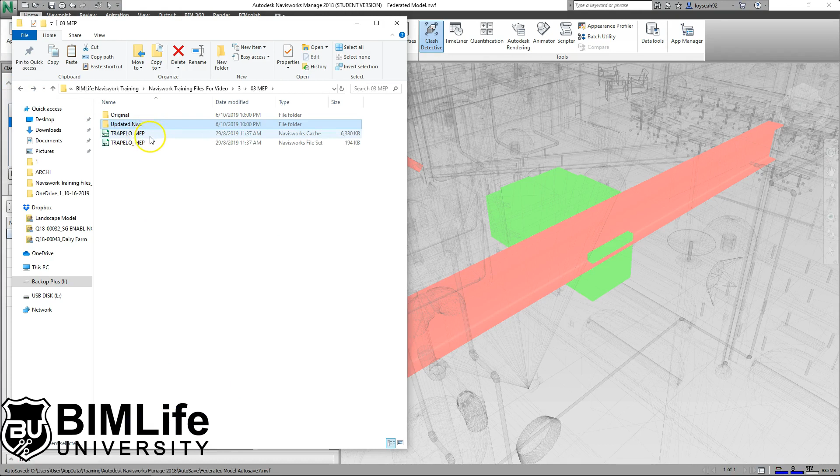Okay, copy this file here. Oops. Wait a minute. Okay, I have an issue with this. Anyway, after you copy, go back one step, and this is the existing, the old one. So just right click and override this, replace the file. Okay, so what we are simulating right now, MEP guys saw the report, they have fixed the issue, they come back 1 week later and tell us that they have updated the model.

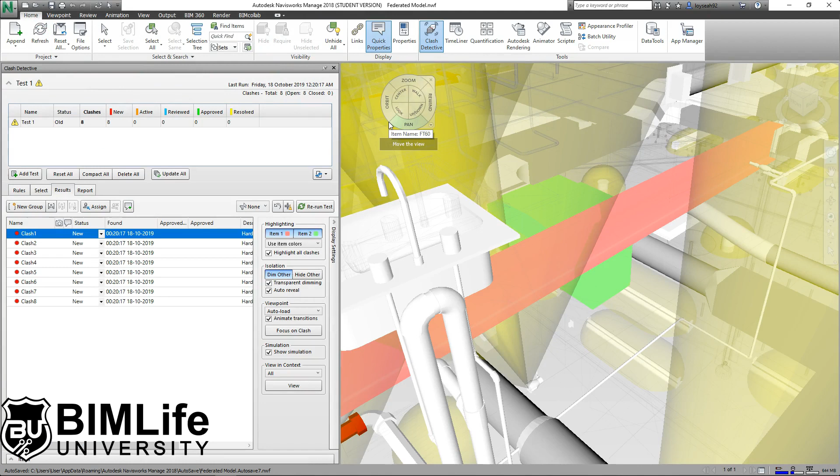Okay, so going back to Navisworks, go ahead and press the refresh button. Remember when you have an updated model, then you need to refresh, right? So that's what we're doing. It's kind of messy here, but don't worry about it too much. Just look at test number 1. You will see an exclamation mark, yellow in color, that appears after you click on the refresh button.

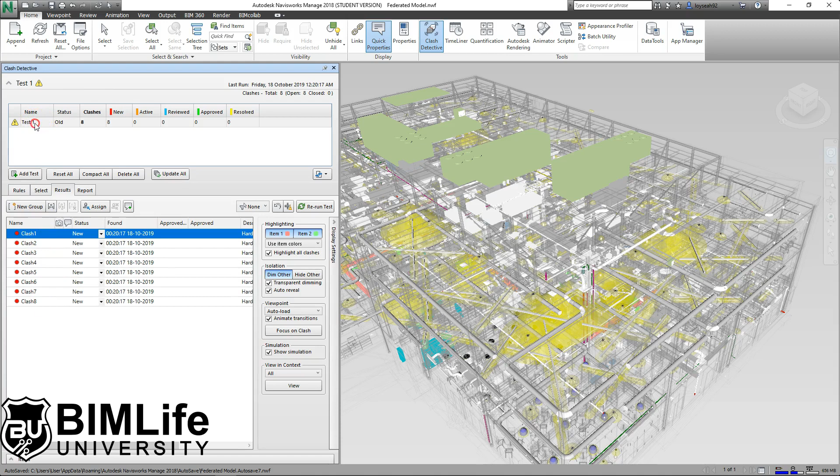And the reason why is because when there are new changes, you need to rerun the test. So the exclamation mark is telling you that your current results, there are 8 clashes, are not updated yet. You need to rerun it. So to rerun the test, just right click and run again. And you can see it's no longer red in color, right? Can you see it's all yellow, and the status is resolved.

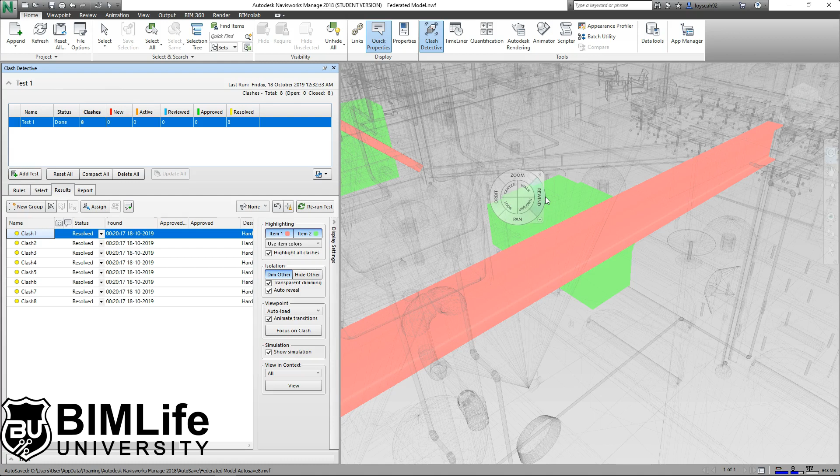Okay, so it means that they are right. These MEP subcontractors have fixed all the issues that we showed them in the clash report, and that's great. And if you want to, look around, just spend some time to maneuver around. Oops, here. Just go and see if there are clashes. There are probably no more clashes in the model itself. You can see they are close to each other, but they no longer clash as before.

Okay, so when they no longer clash, one of the behaviors that you can see over here, just because it doesn't clash anymore doesn't mean it's not going to show up. It's going to show up as resolved. It's not going to be blank. It's not going to be an empty clash report. It's going to show that you have these 8 resolved clashes.

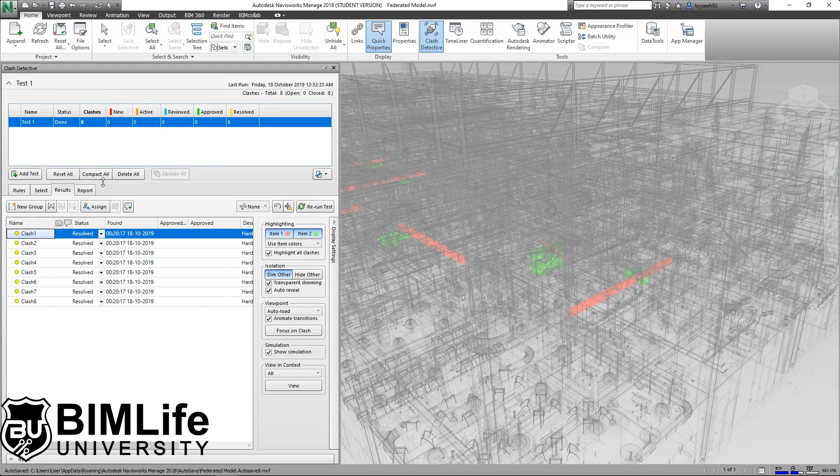Okay, so once you have your updated federated clash test, what you can do is you might want to create a report again, just to keep a backlog that the guys have changed the model or have resolved the conflicts in the model. Because the next button I'm going to teach you is this button called compact. If you hover over this button here, it says clear resolved clashes from this test.

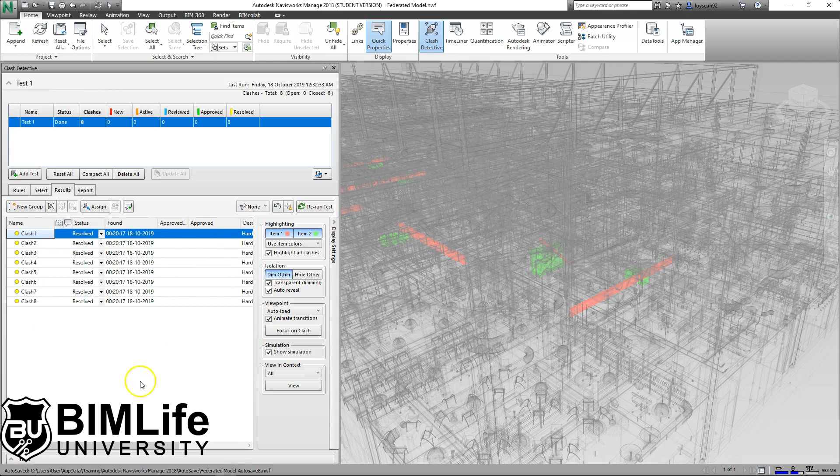The moment you press this button, these clashes that are resolved will not appear on this list anymore, which also means that if you wanted to do a report that showcases that people have been fixing the issues, you are no longer able to do that. So if you need a report to let different parties know that the issue is resolved, I recommend you write a report here. I'm not going to do that, but just in case you need it.

Okay, so go back to the results. You can use this compact, and anything that's resolved will no longer show up in this list anymore. And you will never get it back unless you go and revert back to the old MEP model, which is a hassle, right? So if you need a report, do the report first. Otherwise, if you feel that you don't need a report for resolved clashes, just use this button, compact, so you no longer see them again.

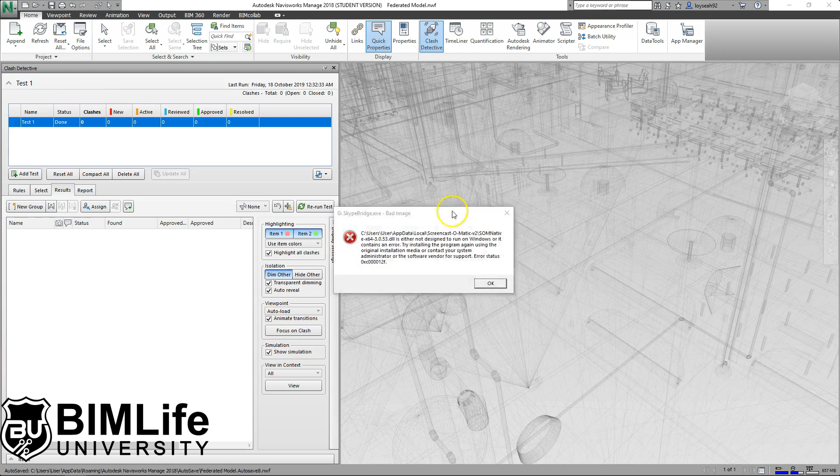Okay, let me see what else we have here. And yeah, we can basically save this file and close it. Remember, close is the new button. In the next video, we'll still be doing clash detection. I believe we have some time.

So what we can do here is go to folder number 4. I need you to go to folder number 4. Okay, so folder number 4 has a few files, and I need you to open the first file, 01 clashes, the Navisworks cache file. Go ahead with that.

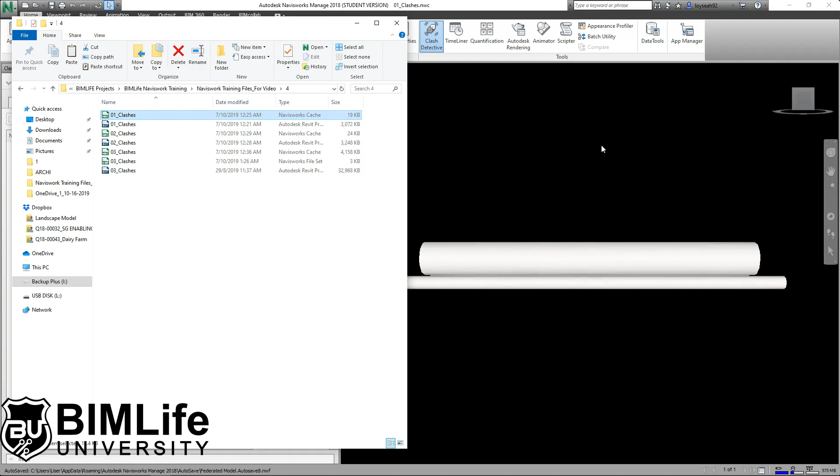And once you open the Navisworks cache file, you can see 4 pipes. Just rotate around, you should be able to see 4 pipes. And I want you to go to Viewpoint. Change the mode to be wireframe.

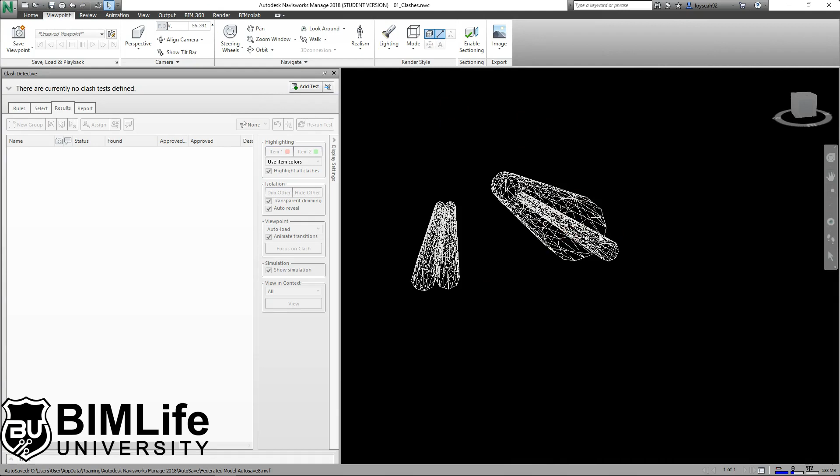Okay, and I have a task that I need you to do at this point in time. Let's take a look at the pipes. They are of different sizes, one big and one small one here. I want you to rotate and orientate yourself in such a way that you figure out whether these two objects here are touching each other.

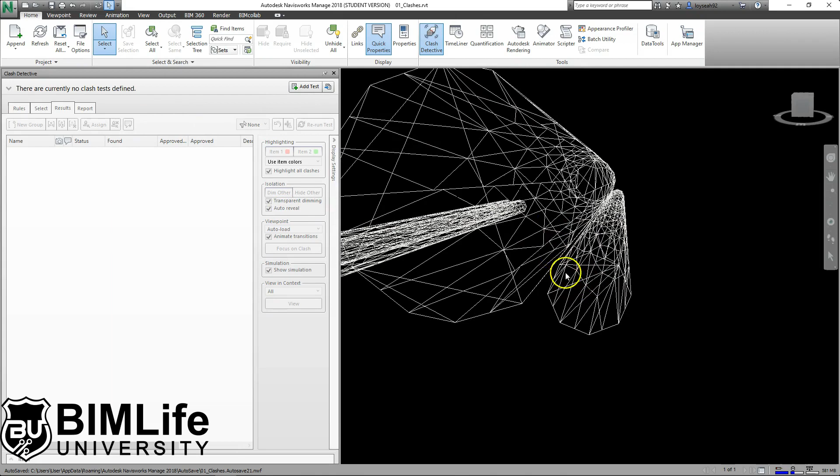So right now we are going to use the clash detection tool to prove that there's actually no clash. Add test, and there's no sets created in this file. So click on the large pipe and use this button called Use Current Selection.

And you can see this is the third pipe. There are 4 pipes in total in this file. Now click on the smaller pipe and use the same button, Use Current Selection, except that you will be on Selection B here. So this one here is the 4th pipe. It doesn't really matter between the 3rd and 4th pipe. I'm just telling you that each object belongs to one of these items in the list.

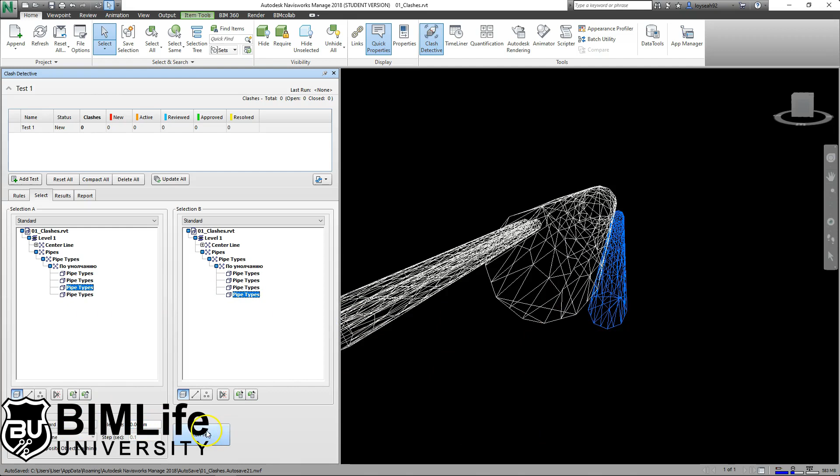Just make sure this is hard and tolerance 0.001, and we run test, and there is no result, which means there is no clash. It also means that we confirm there is actually no clash between these two objects at this point in time. So right now I want you to click on this Navisworks icon, Options.

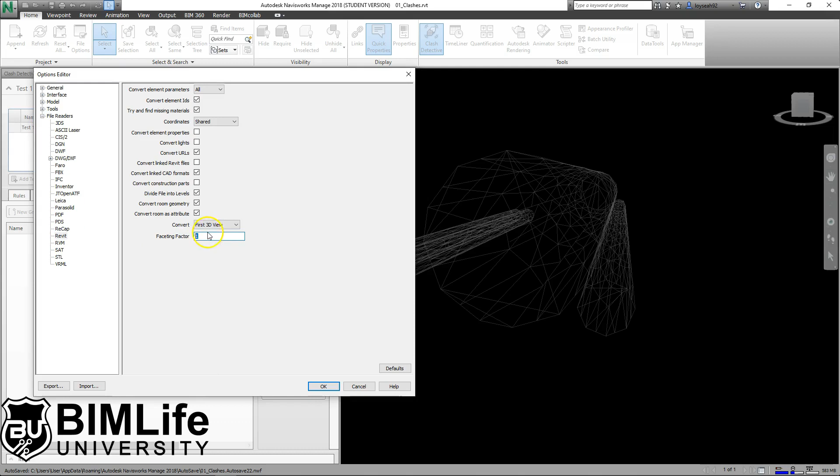File Readers. Click on the plus icon, go to Revit, and you'll see this setting called Faceting Factor. At this point in time your computer should show 1. I want you to change it to 50. Press the OK button, and you will realize that nothing actually changed.

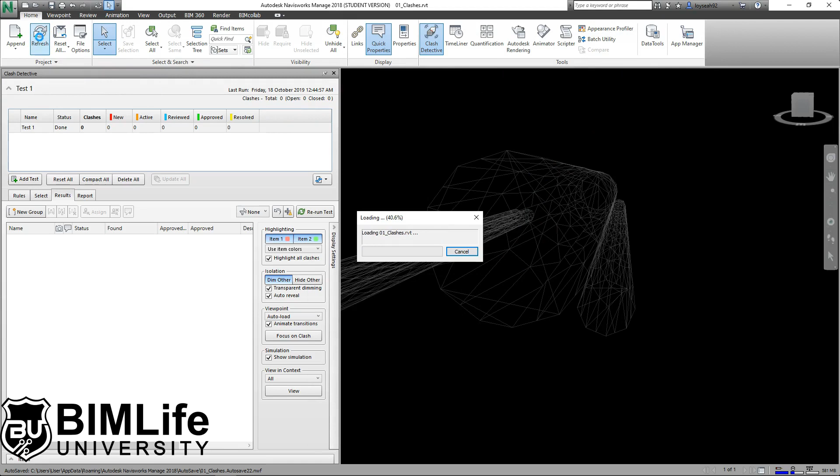But I'm going to take a snapshot of the current view that we have. So this is how it looks currently, and I want you to click on the refresh button. When you change the factor, you need to click on refresh to see changes. So what does the factor actually do? You can see when you increase the factor, there are more lines drawn. It looks more completely rounded.

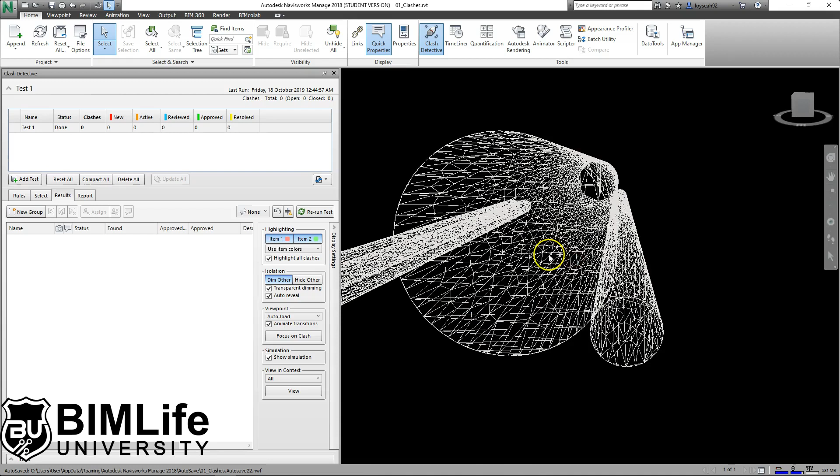So after you change the factor itself, I want you to run the test again. Right click, press Run, and now you will see clash number 1 appearing between these two objects. So why, when the factor is increased, there's a clash? This is one of the reasons why.

Let's say you are running a clash test between all the models, and the other party, maybe the contractor or the consultant, decided to do their own clash test. Your test has maybe 100 clashes identified, and then they come to you and say, we ran the same BIM models, we have 300 clashes. Why same BIM model but a different outcome? One of the reasons is because you haven't agreed on this number here, the factor itself.

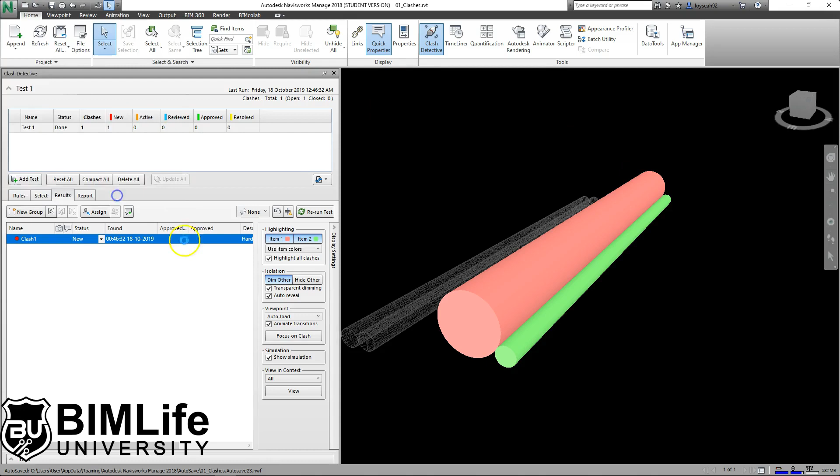So before you run clash detection, make sure that all parties agree to use the same factor. Otherwise, if multiple parties are running clash detection, everybody will have different results, partly due to this factor. And of course, the higher you increase this number, the geometry of the elements becomes more defined and more accurate. You can see it's more of a rounded circle. But at the same time, you will find more clashes as you increase this number.

So most of the time what I suggest is to keep it the lowest. The lowest you can input is 1. The reason I recommend this is because if you set it to be super accurate in terms of geometry, you will find many clashes that do not impact the cost and time of the project. Even though these two objects might be colliding in the BIM model, there will be no issues during construction. This can be rectified immediately on site.

There is no need to point it out as a clash and then go through the hassle of saying this is not something that needs to be solved in the BIM model, we can solve it on site. So you may have 100 to 500 to 1,000 items that you could have just solved on site, but since you used a higher factor, they appear in your clash list and you need to filter them out individually, which is a hassle.

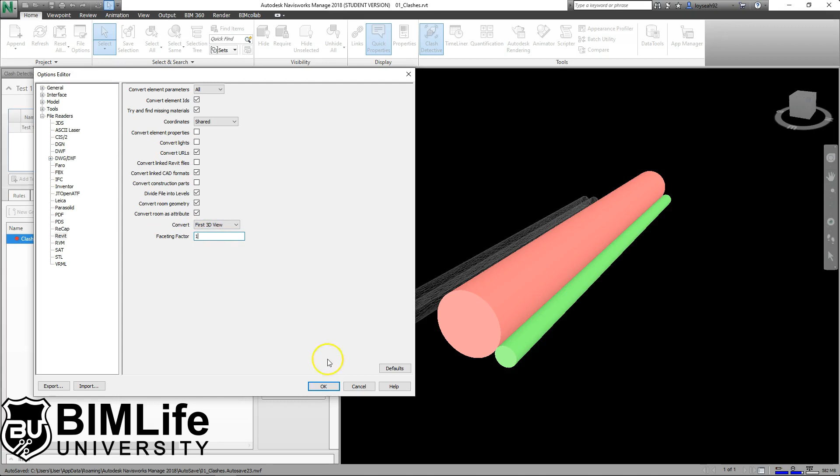So I always keep it as 1, and if there are clashes that are so minuscule, then it's better to solve them on site. There is no implication to cost or time. In fact, when we increase the factor, we would in return encounter cost and time overruns. So keep it as 1, press the OK button, and remember when you change the factor, you need to press the refresh button.